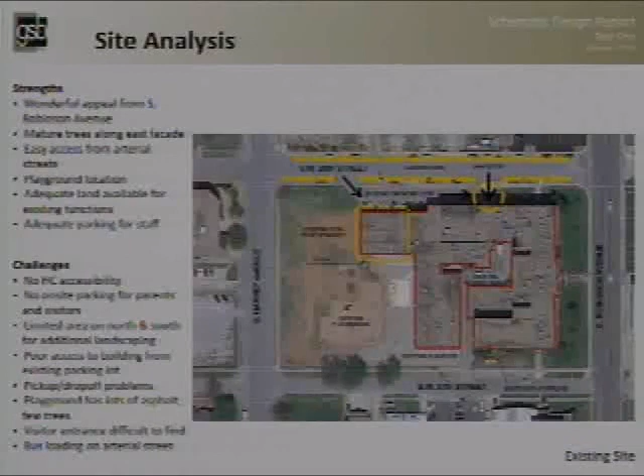The historic entrance is on Robinson Avenue, grand old facade, but is no longer functioning as the entrance to the school. That happens presently on 26th Street, and there are enormous congestion problems, access problems, traffic issues with loading and unloading students before and after school. And the buses currently actually queue up on Robinson in one of the traffic lanes in front of the school, on the east side of the school. So we're going to be addressing all of those issues as a part of this work.

One of the most significant things, many schools are getting elevators for handicap accessibility. This school actually has so many levels in it that we're going to need a series of ramps and 2 separate elevators in order to provide handicap access to every classroom. So it's a really complicated accessibility problem that we're addressing.

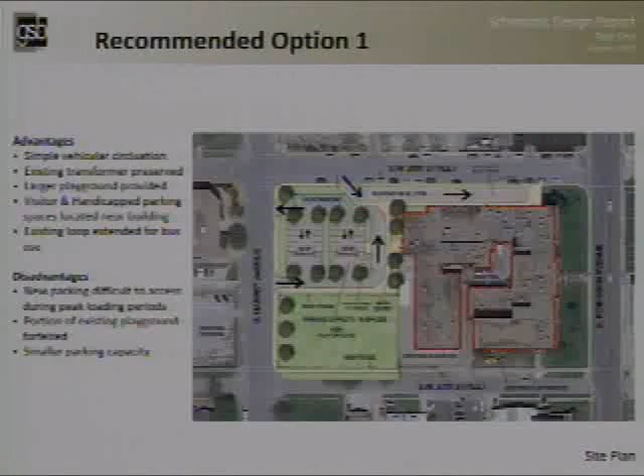This is the site diagram that was recommended by our firm, and the principal, staff, and others have agreed with this assessment, so we're proceeding with recommended option 1.

As you recall, we're deleting that gymnasium. That's going to create a new west entrance. We'll have a new drop-off area and some limited visitor and handicap parking there on the property.

The playground will be reworked, new equipment, existing equipment relocated, new landscaping. We'll be removing some deteriorated blacktop, some of those unused portions of the property. So we'll have a new playground and some new drop-off and parking amenities.

We're actually working around an existing transformer to try and be prudent with the funds we've been allocated. We're also extending the existing drop-off loop to accommodate buses, so the buses will no longer have to do their loading and queuing on Robinson.

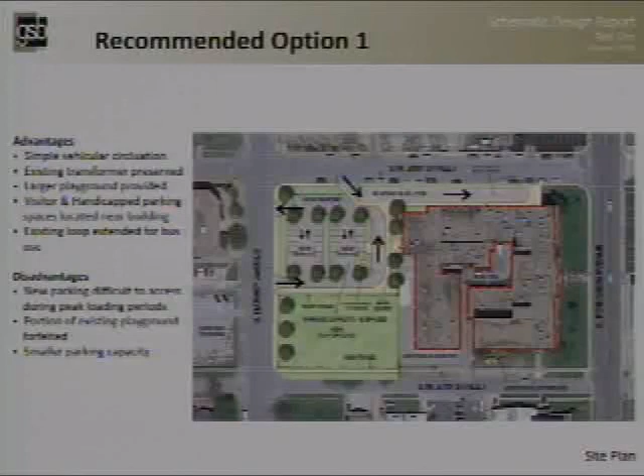Robinson will still be the handsome historic facade of the building, but the entrance will now be on the west, and hopefully that will address some of the wayfinding issues. First time I arrived, I wandered around the building trying to find which door wasn't locked, so we'll solve that problem.

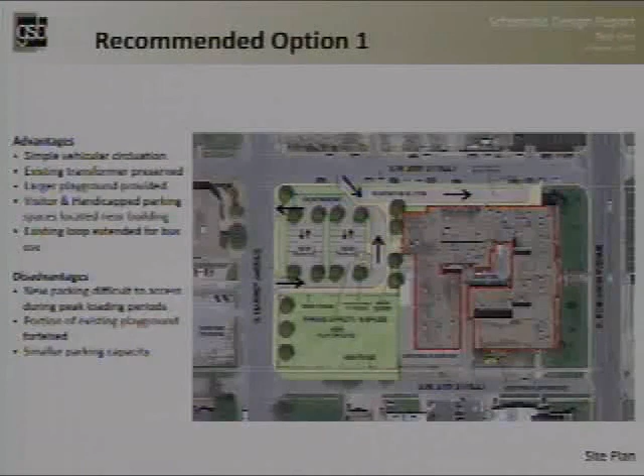Quick diagram of the building. One of the significant changes we're going to make is to move the administrative office from the second floor adjacent to our new entrance. So no longer will you wander in the door trying to find the principal's office, with the security concerns that come with that. There'll be a new office suite adjacent to the entrance, so in addition to security measures, there'll be eyes on the door.

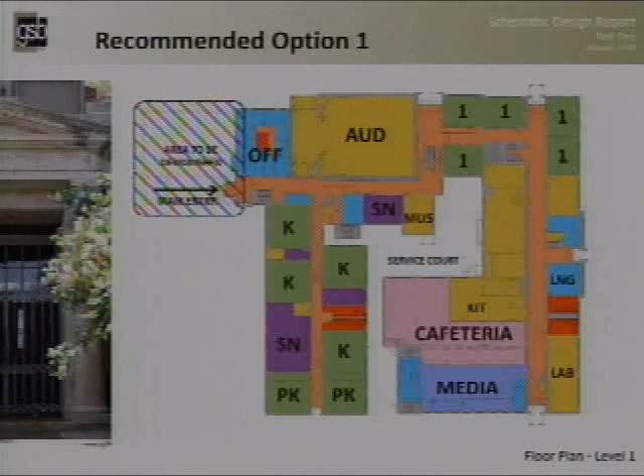We're also keeping the lower grades downstairs. The kindergarten and pre-K kids will be nearest to the playground. And we're taking the media center and relocating it into an existing abandoned swimming pool area. It's kind of a large space with some windows, and we're taking advantage of that, creating a more significant media center with better proportions and better support space.

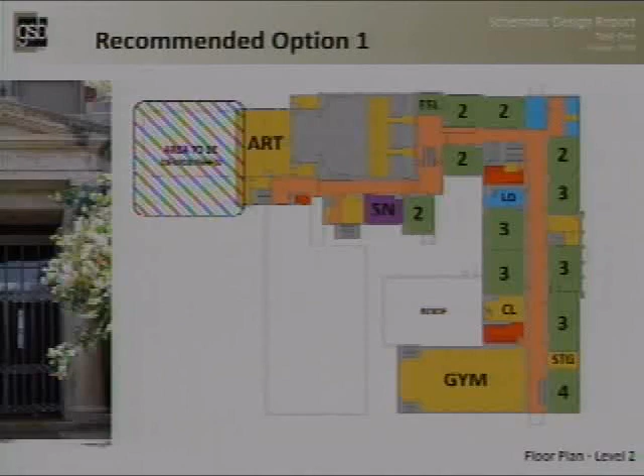Classroom space upstairs, ages increase as we go upstairs. We're doing our best to minimize moving walls and those kinds of things, but we'll be making upgrades to restroom facilities and finish improvements throughout the building. We're trying very hard not to radically redesign the interior and add cost to the job.

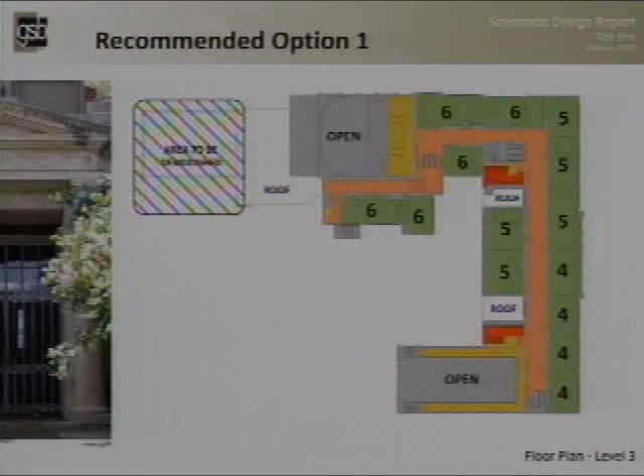Again, the third story, which is kind of odd for an elementary school, will have the highest grades. So that's the arrangement of the spaces in the building. It won't be dramatically changed from the exterior, and our new addition will be in keeping with the historic facade, so wayfinding should be improved, and the overall site plan should work much better.

At current, we are within the project budget, so we'll continue to monitor that vigilantly and adjust the scope items as we need to stay within that target. If you have any questions, I'm happy to answer them.

Question, Chairman: the new front, is that going to look like the old building, or more modern? Have we seen that yet? We have not developed those elevations. When we come back in the preliminary report, we'll show those to you. It's our assessment and the principal's agreement that it should be very much in keeping with the historic building. We're not going to match it exactly, but we're going to use similar materials, massing, and elements, and it will be familiar to the architecture of the building.

What did the public think of this? Do the community groups like the idea? Well, the community meeting was sparsely attended, but the staff meeting was very productive and very encouraging, so we've had positive feedback to this point.

I think if nothing else, the site improvements and access improvements, the parents are going to notice dropping off and picking up kids how much better things work. So even if they don't set foot inside the building, I think they'll be pleased with the changes. Okay, thank you. Other questions?

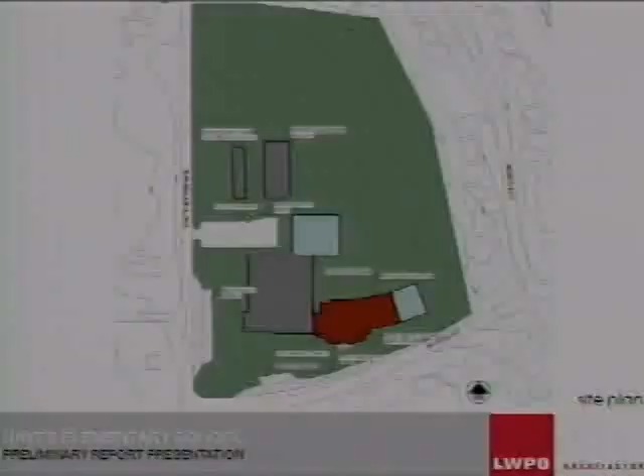As far as the site layout, we were very fortunate to have a tremendous amount of site. What we looked at was going out to the east with the new addition, the area colored in red. You'll see at the end of that we also made provisions that additional classrooms are possible, which is good, since the next phase includes the gymnasium with some additional classrooms, and that project already has a request for proposals out.

As far as the master planning, this should go forward without any problems. The entry was on the west, and you'll see that little nub sticking out there, which is very difficult to identify from the street.

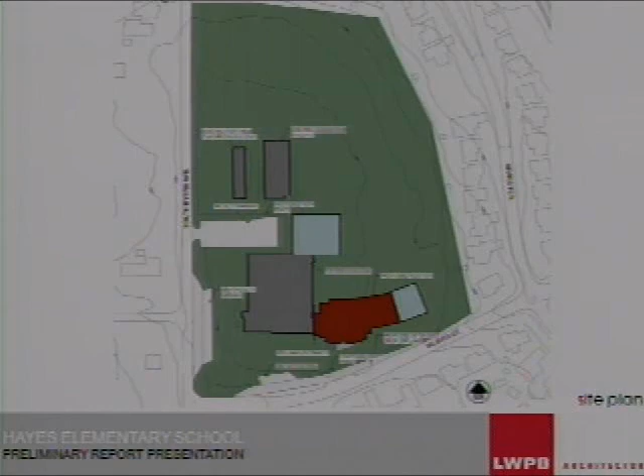This allowed us to put the entry on the south side, extending the student drop-off and pickup, which is very difficult during the afternoon hours. So with this revision we were able to improve the site circulation as well.

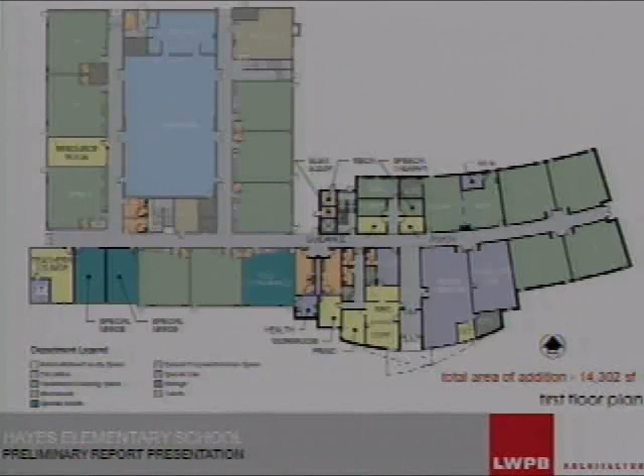That is the current teacher's lounge and administrative area, so we have increased that area.

What we have done is take the media center just north of the teacher's lounge—that is the current media center—and convert it to a pre-K classroom. Up on the second floor there is a computer lab that will revert to, I believe, a third or fourth grade classroom.

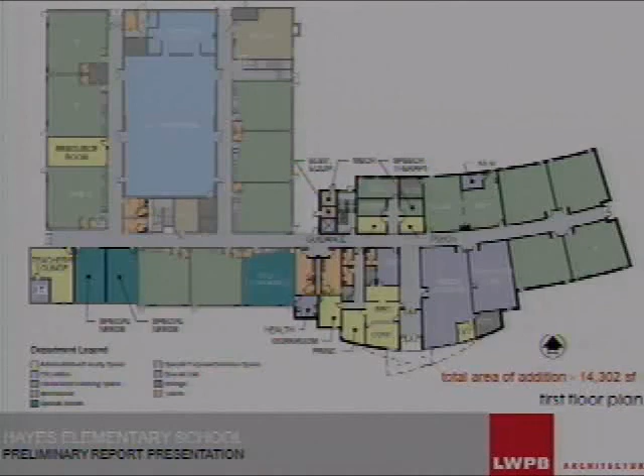As we organize this, we put the administration area out front where it has visibility, and during the day it can be locked down so that any visitor has to go through the reception area and check in before they can go into the classrooms or back into the school.

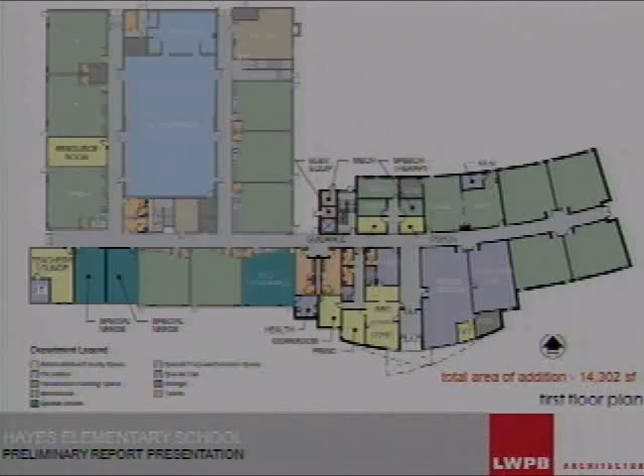The media center is right out front so that it has the visibility, one of the areas that's going to have the most function with the outside, with a computer lab adjacent to it. Its function is changing as these programs have developed and the computer capabilities within the schools have developed.

The classrooms are on the east side so that they are able to be expanded. Then we have music, art, and some of the other functions in the back.

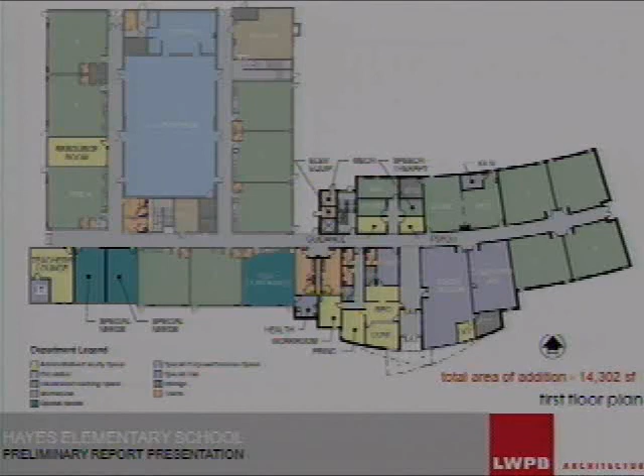We have an elevator and stairs. One of the things we did between schematic design and the preliminary report was take comments from the staff that they needed toilets on both floors.

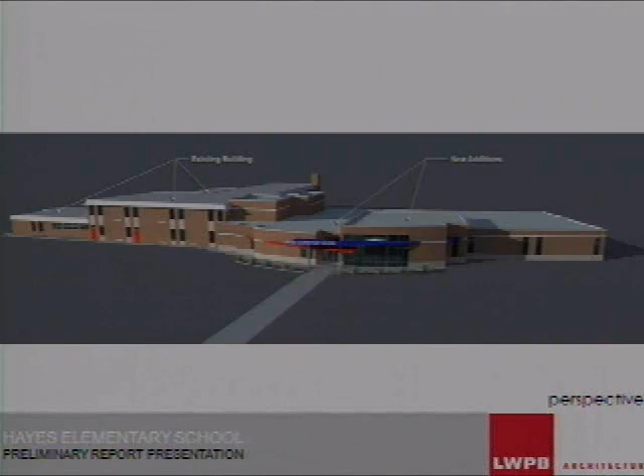Now, with this perspective, you have the existing building to the left and the new addition as you're looking at the entry and media center.

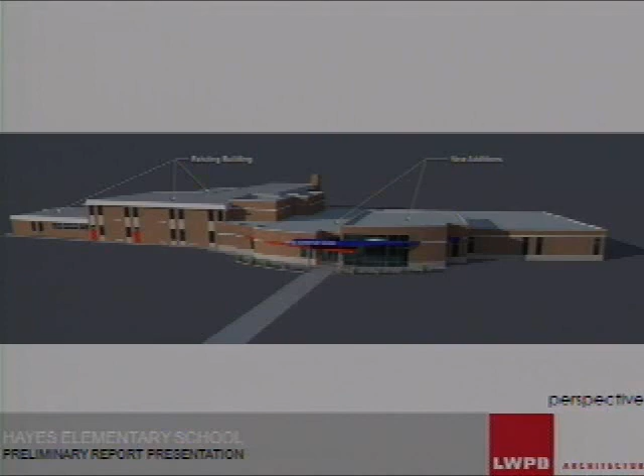What we've tried to do is pick up some of the horizontal elements that are there, but also keep some of the vertical window elements into the various classrooms to tie it all together.

We put a water course down along the bottom that picks up some of the other elements in the school, but moves it away from that late 50s design into a more modern design.

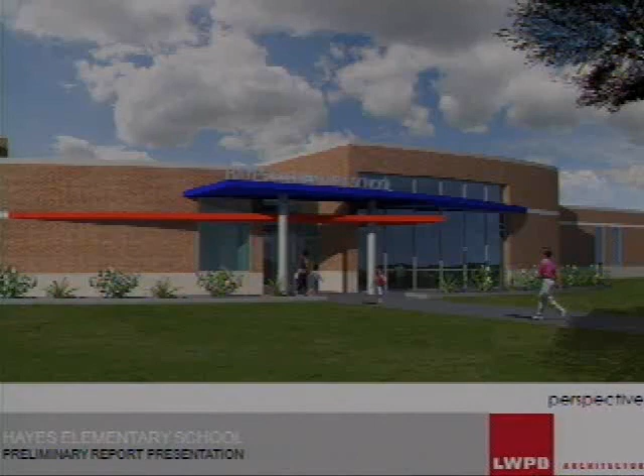Here's a rendering of the entryway, and as you can see, the glass provides visibility both into the media center and from the administration area for that control function.

One of the things we were also trying to do is carry that splash element inside. That swoop element as you come in points down to an area we are discussing with the school.

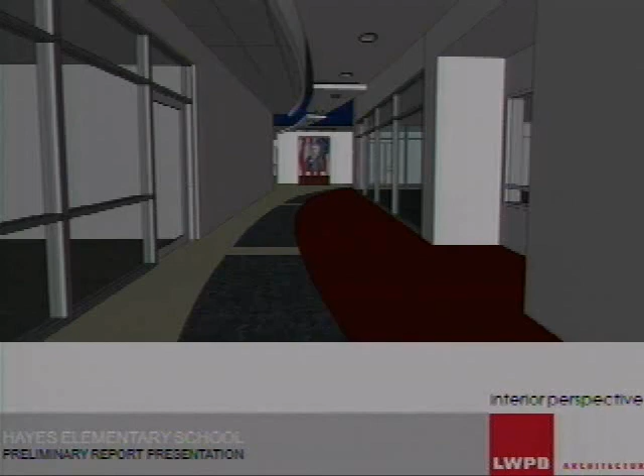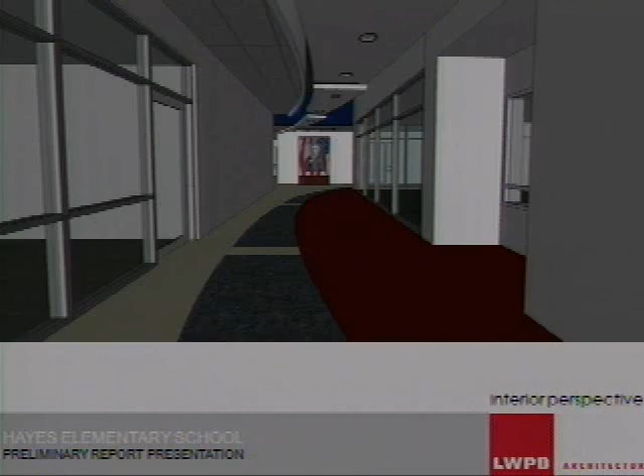We are talking to the school about what we can have at the end of that hallway, which will be a significant element. We have 'Hayes' up there right now as the name for the school.

We have also talked to them about possibly doing tiles that the students could do, giving them some input on something that is a lasting memory that carries through.

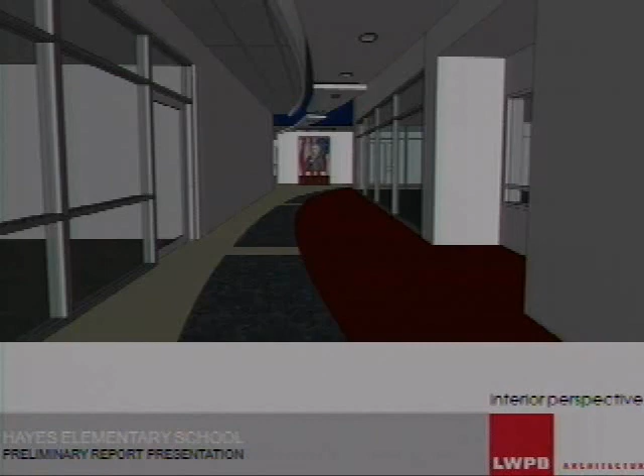In this case, the administration is on the left, the media center is on the right, and this is looking back towards that entry.

What doesn't show up in this is going down towards the classrooms. We are carrying through some elements and trying to jazz up the entries to the different classrooms.

One of the things we are doing in the existing building is changing out all the flooring finishes.

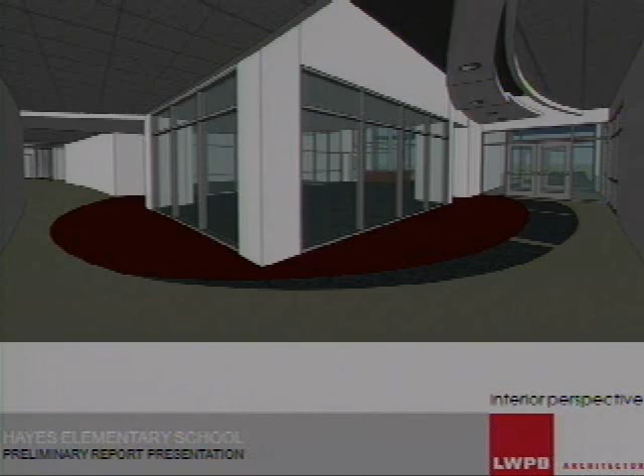There are two other items that have been identified as really critical to this school that we are able to get within the budget. We are replacing the roof, which is very dated, and we are adding fire sprinklers, a fire suppression system, to the existing building.

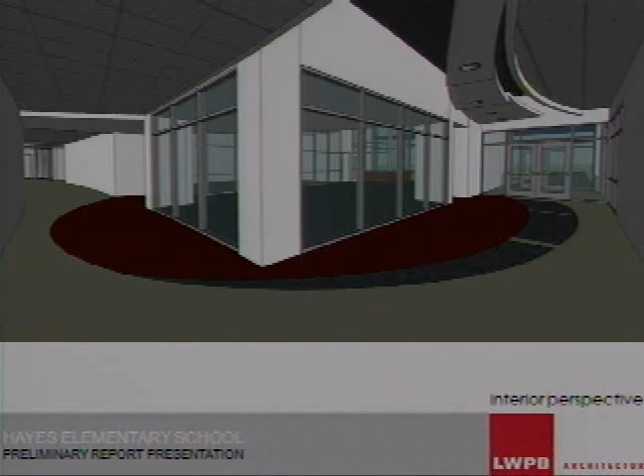So the whole building will have that fire suppression system. With that, we're able to do some things with the ceiling elements and carry that through on both pieces, both the existing and the new.

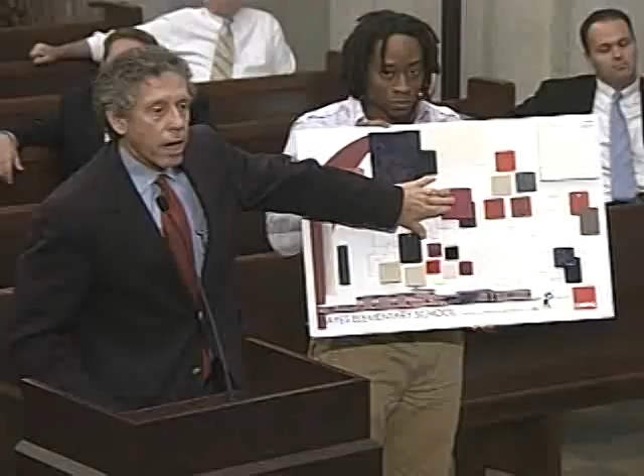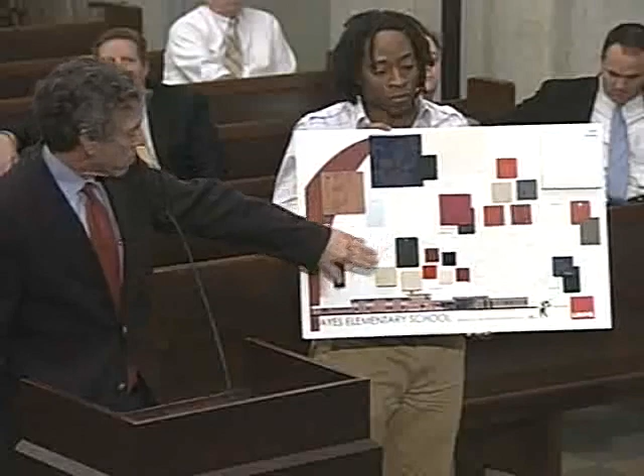I apologize, but we do have the color board here. Again, we're trying to pick up the reds, go with the neutral palette, but things like the administration counter will have a bright red. In the media center, we're going with a darker color. The carpet has symbols in it, from chemical symbols to other things, to show that educational component in the media center, with splashes of accents elsewhere. I apologize that slide did not come off as well, but we had the board here.

At this point, the budget, as I mentioned, we're just slightly over, but we're very conscious of that, and we've got options here that we can identify as alternates as we go through to construction. We're on an almost $9 million budget, and we're only $12,000 over, so we feel very good at this point, especially with adding the fire suppression system and the roofing.

We are working diligently to move the schedule up, trying to get this done this first summer. Our original goal was to have two summers so they could work on the existing building while putting in the fire suppression system, and we're on track to get it to bid in April so it can go out for construction in May. With that, I'll be glad to take any questions.

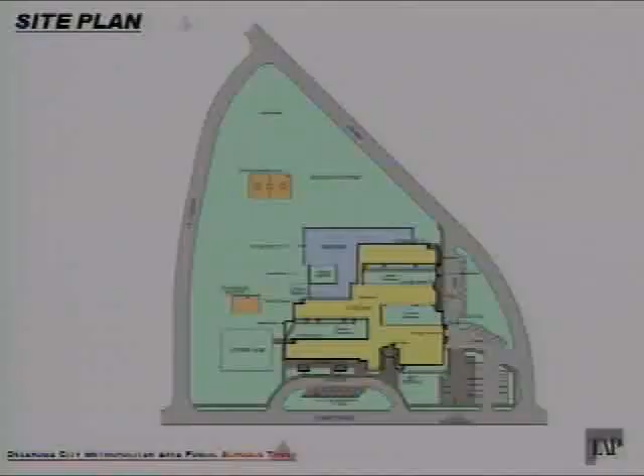On the site, they had existing parking in the courtyards, which we're now making into outdoor classrooms. The parking in the courtyards was non-compliant, just not standard, so we're adding spaces to make up for that, as well as adding more spaces in the pick-up and drop-off line, which the school currently is very happy with and doesn't want changed because of its location relative to the multi-handicap classrooms.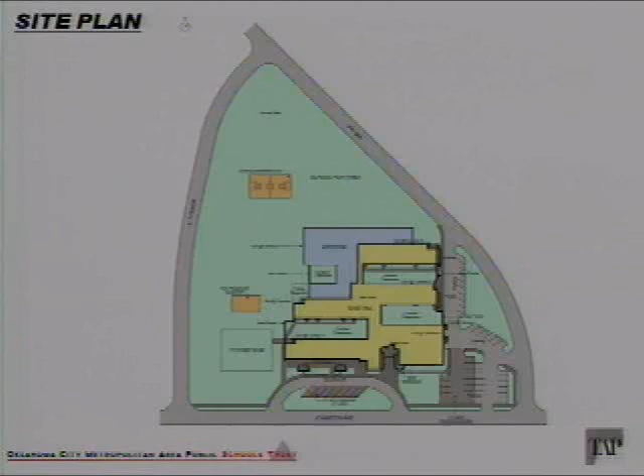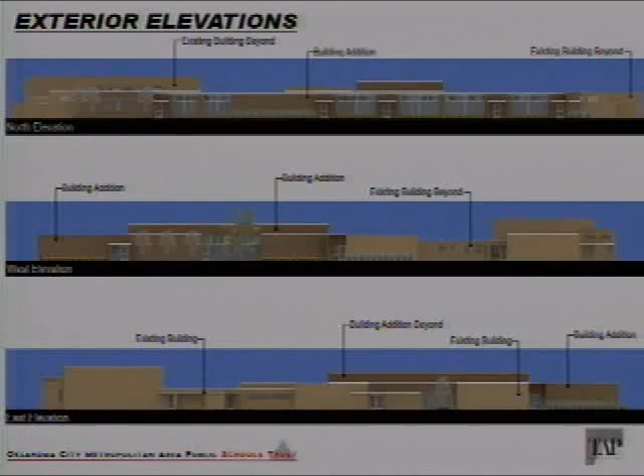Yes sir, what did you do with the roofs? What we ended up doing was taking a roof where the finished height was 8 feet, and we raised those to 14 feet, basically building over the existing corridor and getting rid of it, to allow half the facility to have a 12 or 10-foot corridor. The old building or the new building? The new building, which was the corridor of the old building.

As they put the new building next to the old building, if you look at the floor plan, there's some demolition of some of those existing corridors that are really low ceiling heights, and they're able to replace about half of the corridors with newer, higher ceilings. So there'll be some selective demolition of the existing building.

That's my point. Are all the corridors going to be big, or are they still going to be small? Not all the corridors will be big, and that's a challenge we have to overcome. There's just not the budget to redo every corridor. It's a single-loaded building, and there's a lot of corridor.

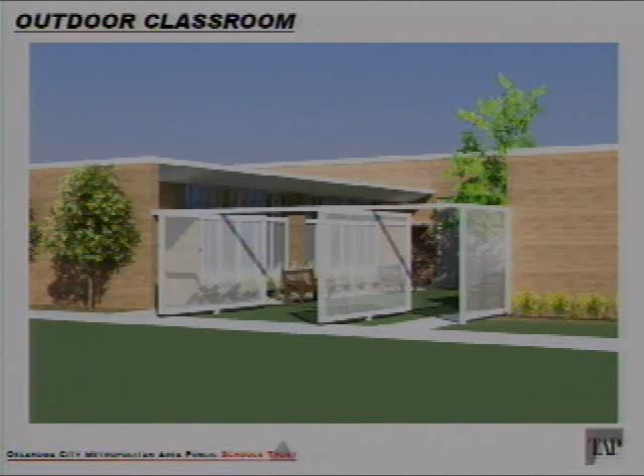This is one of the outdoor classrooms I was talking about earlier. One of the problems the school currently has is that the classroom courtyards get used at night by people not associated with the facility. They find unpleasant things there in the morning. What they'd like to do is close those off and make it a safe environment both during school hours and after school hours. So what we proposed is a center-hinged gate that would allow it to be quite open whenever they want it to be, and shut off during non-business hours.

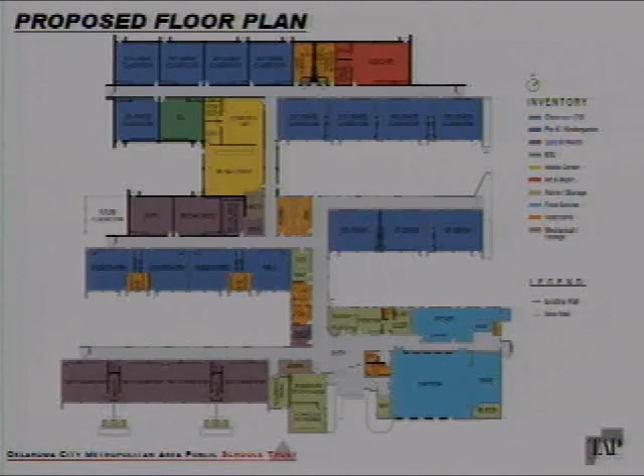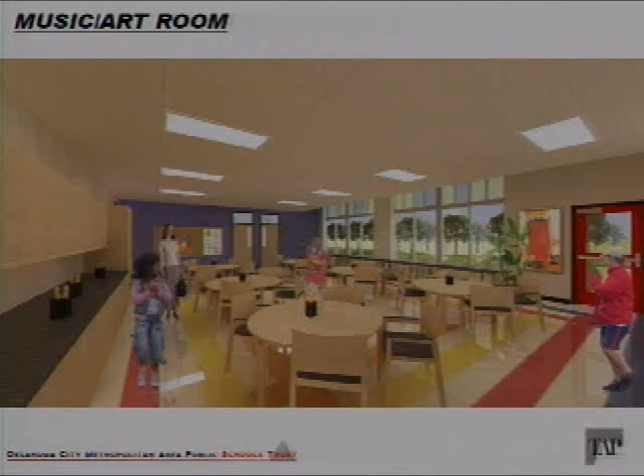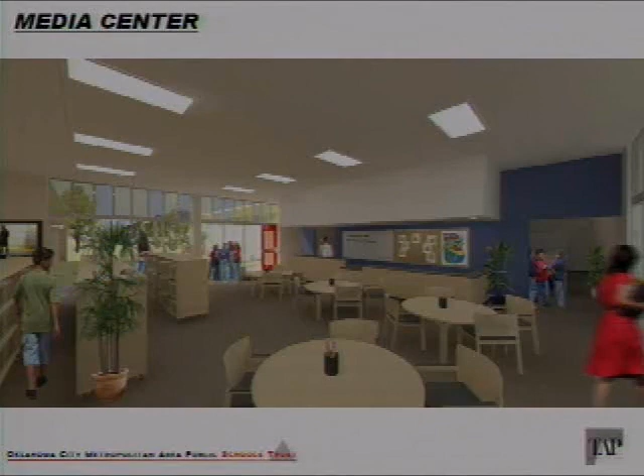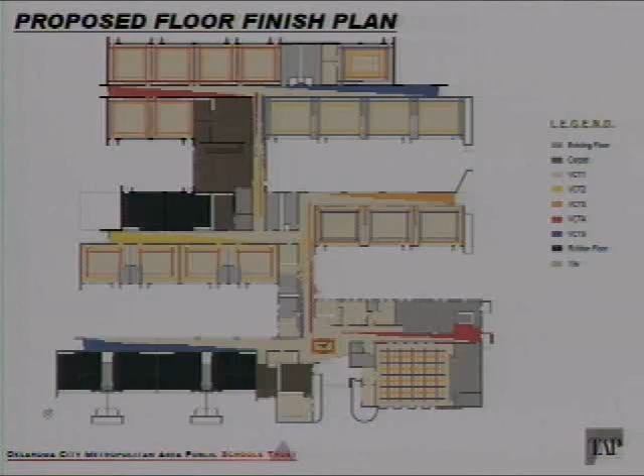This is a floor finish plan. As you can see, when we met with the principal, the colors are a wayfinding material, so they know they're in the blue, yellow, red, or orange corridor. That seems to be one of their problems - having young children figure out which corridor they're in early on, in a facility that's as spread out as this one.

As far as our schedule, we are currently on schedule to finish construction documents by the end of January for review, for bidding in March, and begin construction April of next year, April 2011, and finish in August of 2012.

As far as the budget, we are currently over budget by $740,820, and that is mainly due to the increase in square footage required by the additional multi-handicap classrooms. That's the same number we presented in the schematic design report.

So if I might address that - we looked at the schematic design, and as David mentioned, a typical school like this would have one handicap classroom serving the students of that area, but this one actually has 4. As part of the review process we went through originally, we've added 3 more, which the school currently has and needs as part of the renovation package. That's 3 in addition to anything else we're doing at this school, and that comes at a cost of $700,000. There are also some additional improvements with fire suppression and roof replacement included in that total. But this is something that's necessary for us to move forward on.

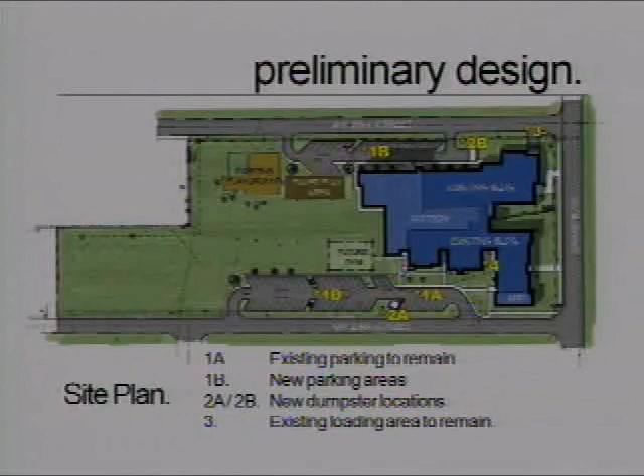Currently, the school, as with a lot of them presented today, has a pretty weak identity at the front door, so we try to correct that with a new entry. The existing parking area on 24th Street will be retained and extended to give us the number of parking spaces required.

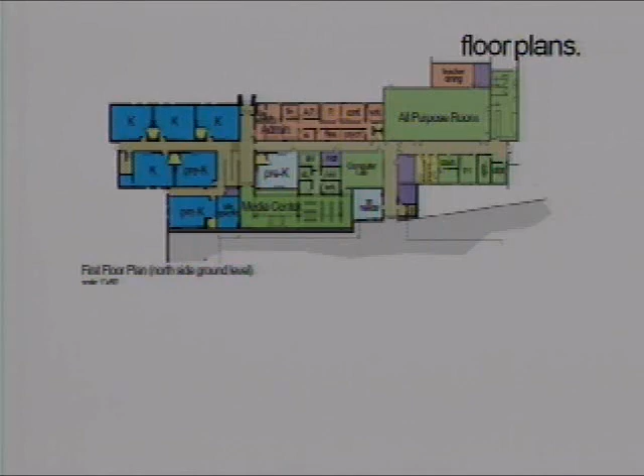The floor plans: this is the first floor plan, the north side ground level. We have relocated the administration area adjacent to the new front entry and provided the kindergarten and pre-K rooms on that ground level. You'll see the media center, built in the existing space between the 2 buildings that has caused all the rainwater issues. By putting a roof over that location, we can drain the rainwater through roof drains and surface drainage and get it away from the building rather than it going into the basement.

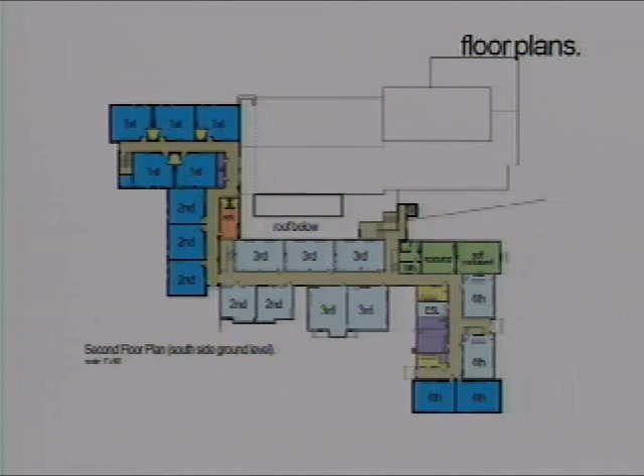The existing media center will be utilized for special needs areas, and the music and art room will be moved to the third floor, which is actually just the second level above grade on the south side. The 5th and 6th grade classrooms will be put on this highest level. The elevator is in the space between the two buildings, adjacent to the existing stairwell that connects the 58 addition to the original 30s and 40s construction.

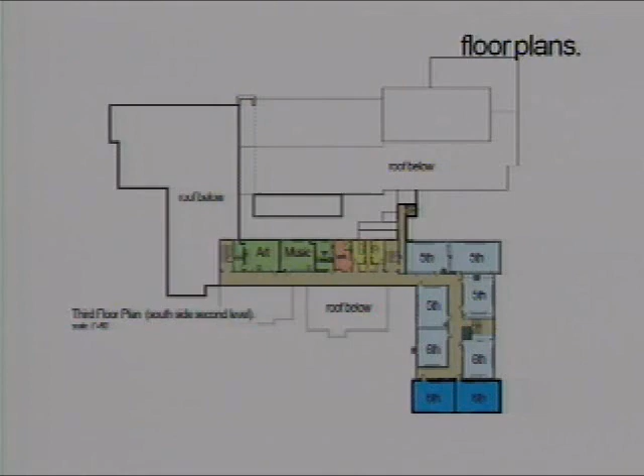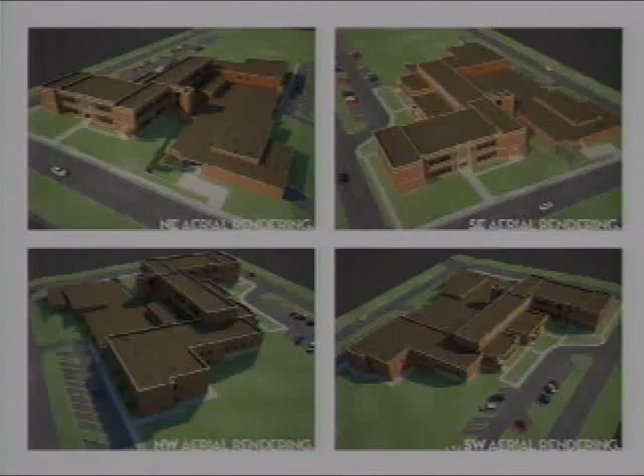The interior design uses natural tone colors that will blend with the existing terrazzo floor and stained concrete of the original construction, which we're going to maintain. We create different accent colors within the classrooms to orient different grade levels.

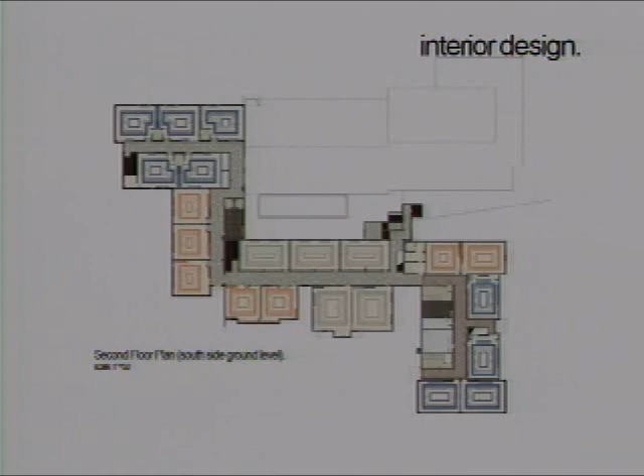The third floor has existing wood floors in very good shape, which will simply be refinished and protected throughout the renovation. This gives a depiction of some of the typical corridor areas, specifically at the main entry, and this gives an idea of some of the accents in the classrooms.

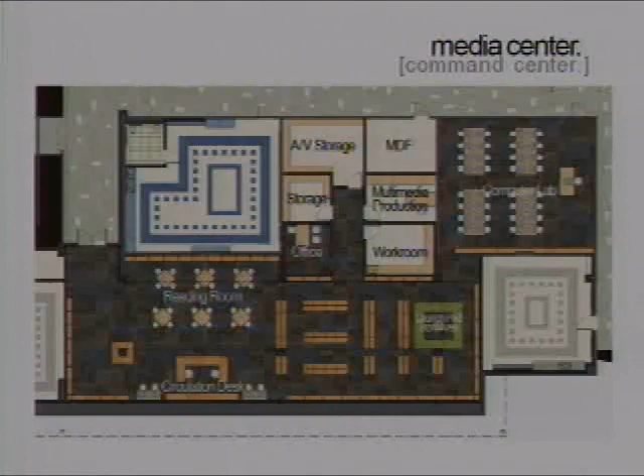The media center I've affectionately referred to as the command center, meant to be the central hub of the school, playing with the mascot, the Rockwood Rockets. We've gone for a playful yet somewhat technical feel with the Rockets theme, dry erase boards, and high monitors to allow natural light into what would otherwise be a landlocked room.

We've got a star field painted up high to give a sense of height and whimsy, but we use a lot of bright white to bounce the light around and make sure the space stays open and bright.

This is an update of a drawing we showed with the schematic report, showing how we plan on building between the two buildings to really alleviate some of the water issues. We create a rather large low roof to collect the water, kept low so we're not blocking the windows into the existing building. Then we have the high monitor area to allow vertical glazing to let light into the media center.

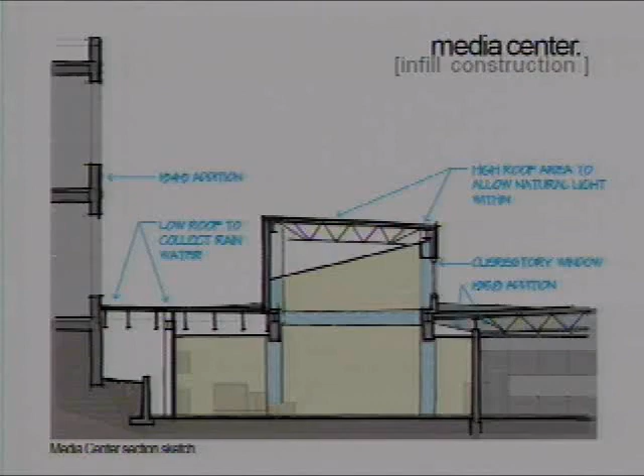Looking at the budget, we are very close to the PIP budget—under by about $9,000, which is pretty tight. That does not include re-roofing the existing facility, which at the time of the site and facilities assessment wasn't necessarily an issue, but at this point we still see that it is. We estimate that value as another $232,000, which through the construction document phase we'll take a look at to see if we can get it within the budget. If not, we're at the mercy of the bidding market at the time.

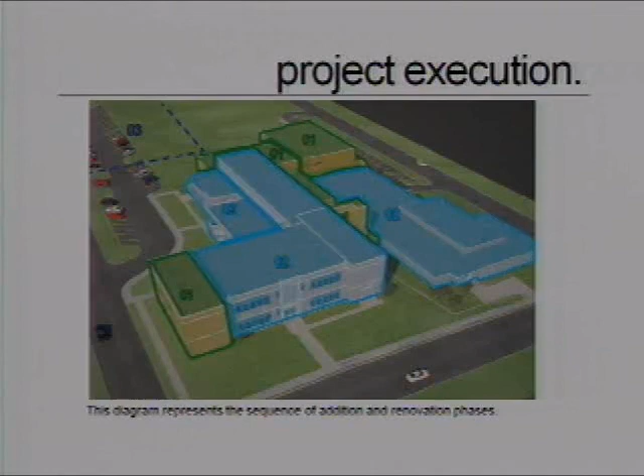Taking a look at the schedule, following suit with a lot of the other presentations, we're working diligently to move the project forward. We're hoping to capture 2 summers for the existing renovation, but the calendar only has it listed as during 1. So the phases are to do the addition first, then next summer renovate the existing building. Once that's complete, the portables can be removed and we can finish the site work, hopefully by fall of 2012.

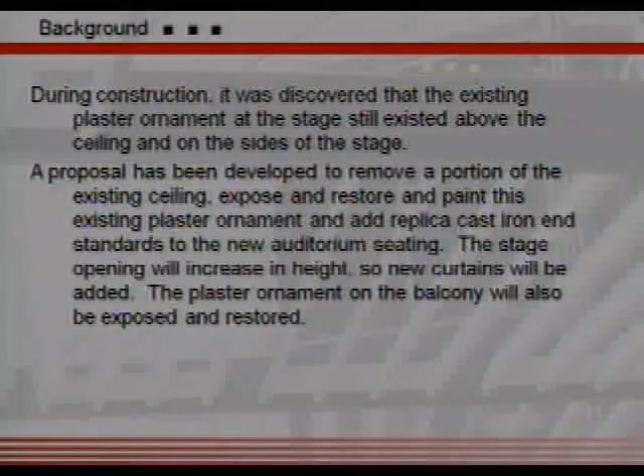The original plaster ceiling, come to find out once we were able to get above the ceiling, was removed. That ceiling was from the 1920s, 30s. So this modern ceiling was put in. A lot of the plaster, all the plaster ornament, was covered. We didn't even know it was there.

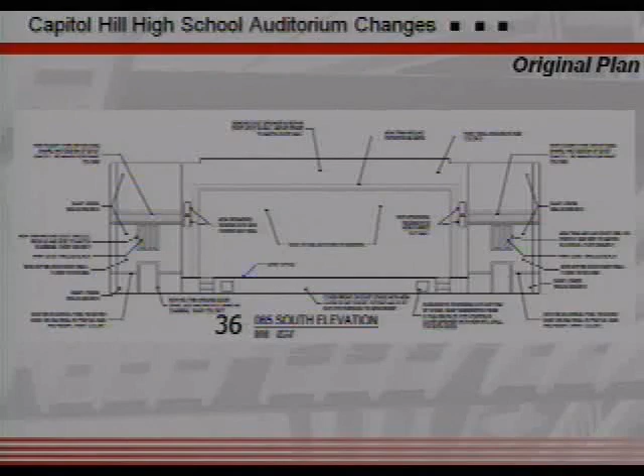But what's not here is the proscenium arch. We didn't know it existed. There's about 10 to 15 feet above this existing drawing that we're showing here that was discovered. And that's what we're going to show today.

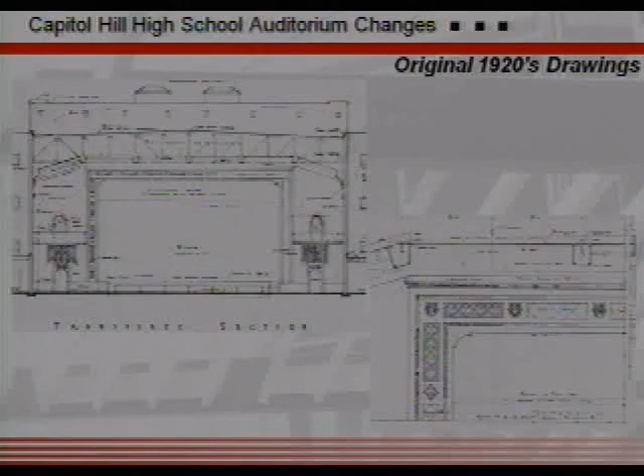This is a section view showing that as well, but what this is really showing is how ornate the ceiling was. That is not what we're trying to replicate. That's gone and would be cost prohibitive at this point.

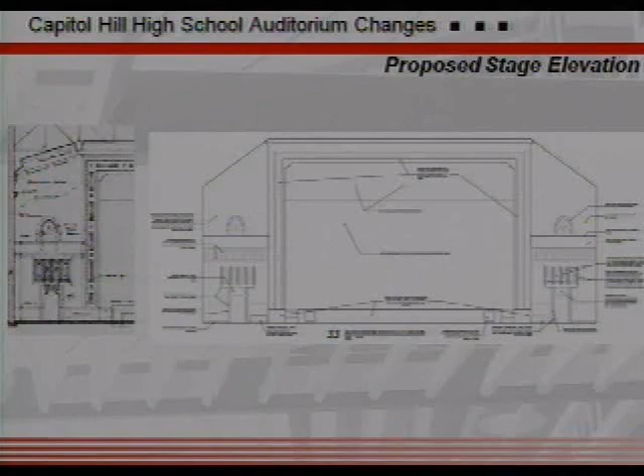Today, the right-hand drawing shows what we're going to do as part of this change order. We're going to replicate both sides of the auditorium, those little pieces that are shown there, the proscenium arch. We're also adding a replica of the cast iron end standards to all the seating in the auditorium. We were able to do that as part of this change order. If you look to the left, you can see how it mimics a lot like the original 1928 drawings.

This is a section view of what we're planning on doing. We're not removing the entire ceiling, just about 15 to 20 feet in front of the proscenium arch, raising it up to expose that arch. If we were removing the entire ceiling, I don't know what that would cost, but it would just be too cost prohibitive at this point.

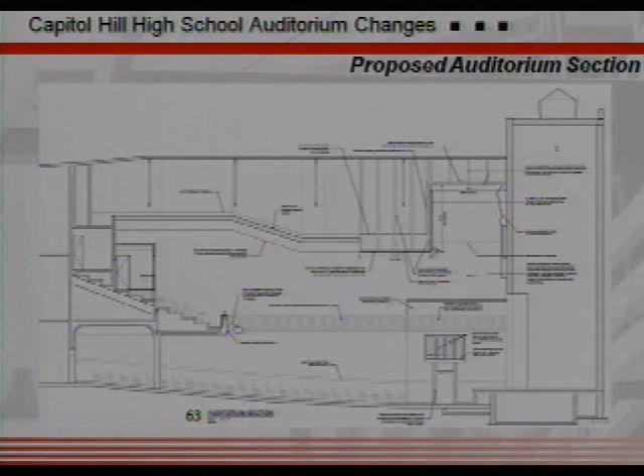One of the things that's been added is all the mechanical and electrical. In the 20s and 30s, it was never conditioned, it wasn't air conditioned or heated to the degree we'd experience today. So there's catwalks and all kinds of equipment above that ceiling. To take the rest of that ceiling out would be horrible.